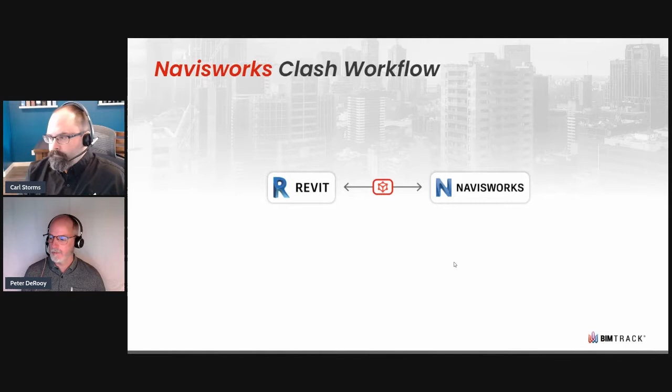So let's talk about the use of Navisworks. The first thing you would do is to set up a 3D view in your model.

Let's say you have a typical team for a project. You might have structural, architectural, and mechanical, electrical engineering firms, and they're working in Revit. And you would have one BIM coordinator that would be responsible for creating

a Navisworks workflow clash report on a weekly basis, typically. So everybody in the team would need to set up in their model a 3D view. In that 3D view, it would just be the model information they were responsible for, their scope of work. They would not have any links, and they would just show in that view what they want to share in Navisworks. So you can create a view template as well in Revit, so you can apply that.

Occasionally you want to make sure that nobody has changed that view. It's quick and easy to make sure that it's going to be set up correctly.

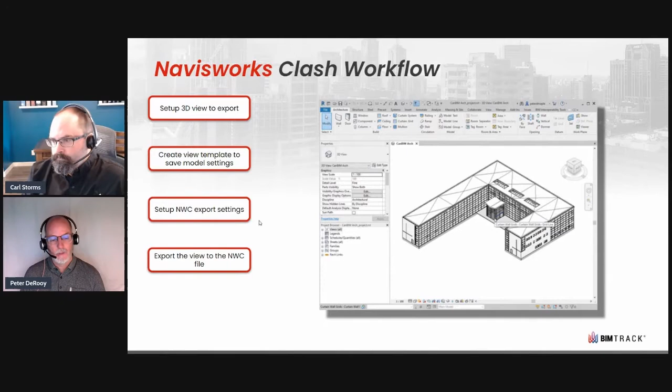Then you would set up your Navisworks export settings, and then you would export out a Navisworks NWC file with the plugin. There are some settings that the team would definitely need to agree on.

The number one important item there is the shared coordinates. There's two different options for exporting out of Navisworks from Revit, and that is project internal or shared.

Typically the architect or the lead BIM consultant would then set up shared coordinates for a project, and then everybody would acquire those coordinates and make sure that when they link in their models and when they're exporting out of Navisworks, that they use shared coordinates.

A couple other items to note here that are important: what you're going to export. The two options there, you definitely want to have current view, the view that you've set up when you're exporting it out, because the other option is the entire model.

There might be other information that you're not quite ready to share, or information that you don't really need. So typically you would turn off all of your annotation graphics and maybe CAD links and other things you might be using for internal coordination or tracing over top of or converting to Revit.

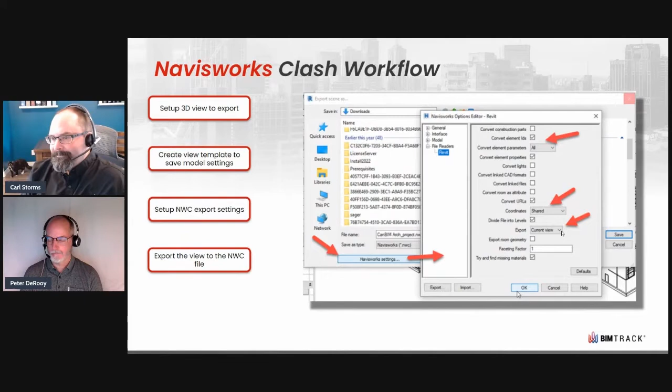The next part would be everybody would need to have some type of file share site where they would upload those NWC files, and then the main BIM coordinator would collect all those NWC files and create a master NWF file. Inside that NWF file from Navisworks, they link it.

It's kind of like AutoCAD where you link in XREFs. That's what an NWC file gets linked into, an NWF file.

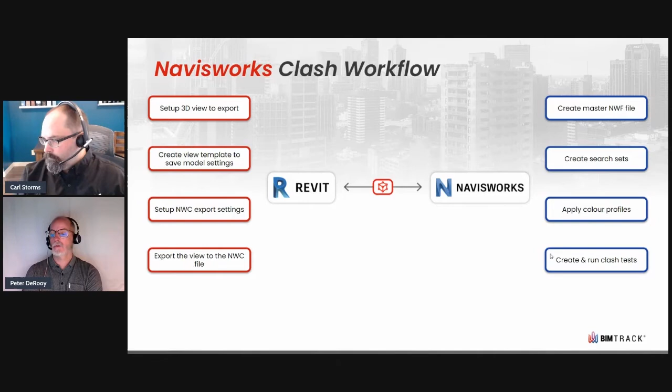In that NWF file, that's the master file where you would create the search sets, apply some color profiles to different things so you can see some different colors for different systems. And then you would create and run your clash tests.

So just a little bit about that. If I switch over to my network directory here, I have a sample data set that's actually a copy of the Autodesk data set, the school that's in every Revit install.

So I've gone through and we've created a bunch of different models for those. These are the RVT files that we're using for this demonstration. Typically then you would open these files up in Revit and export out your views.

So here's the typical Navisworks NWC files. And then they are all linked into the master NWF file that I have here.

So in Navisworks, you'd be setting up some search sets. I can talk a little bit about how to create search sets, but there's lots of YouTube videos and training materials on the web about what a search set is versus a search selection set and how to create them.

I've gone through and created a lot of different search sets to pull different information into those sets, and then we would be using those sets for applying colors in the Navisworks model, so we can have some differentiation in terms of mechanical, electrical, and structural for this demonstration.

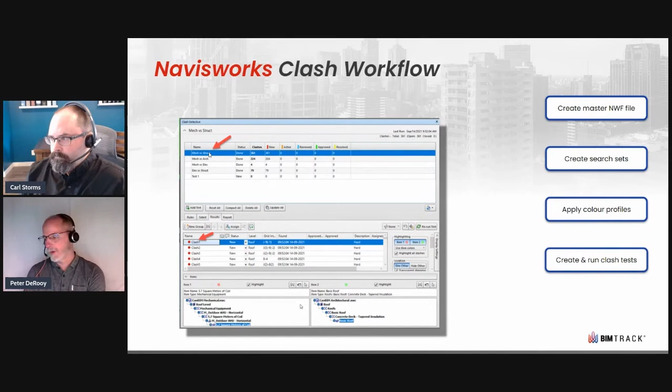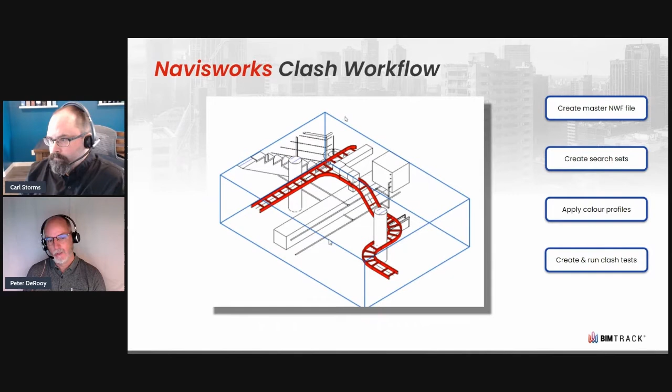So they're going to be involved in the process, but typically their stuff doesn't move. They're approving a sleeve in this location or advising, no, you can't put a sleeve there, you've got to do it in the center of the beam versus where a connection might be. So that's something to think about. So here's an example: in this data set, there's some cable tray that obviously is not quite right.

Now, once you've created all these clash reports, what do you do with them? Well, you have to communicate them to the external parties. And so there's two routes. We're going to talk about the Navisworks traditional approach at this point, and then we will get into how we would use BIM Track to help manage those.

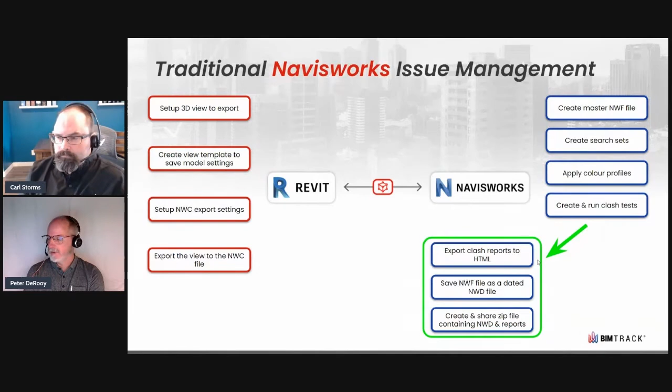So the typical process would be you would export those reports to an HTML page. Then you would save the NWF file as a dated NWD file, so it's sort of a snapshot in time of what the Navisworks model at that moment in time looks like. And then you would zip up that NWD with the reports and upload them to a share site.

So if I go here, there's the NWF file. Once we've got all the updates for the NWCs, we would run the clash reports, and then we would export out the reports. So in this folder here, we have the actual report files in HTML. Now Navisworks can export out different types of files. They can do an XML file, but I find that for most teams, they probably do an HTML report.

And then I've saved the NWD file with a date and time. So that's a timestamp, so that when that gets shared out, everybody knows the date that NWD file was created. And it's a snapshot of time, because let's say a week from now, or 2 weeks from now, depending on how often you want to do a clash detection update, you would then date it at that point. So that way everybody knows, okay, there's a newer version. This is quite old. In the future, this will be like a couple weeks old. So that's something to consider.

Peter, sorry to interrupt, do you ever take advantage of the automatic locking feature of the NWDs? Where, after a week or a month, you can't open them anymore. They self-corrupt as part of this workflow, or do you find that giving them a date is enough? I'm not sure if Navisworks can have an expiry date on an NWD file. I'm not sure.

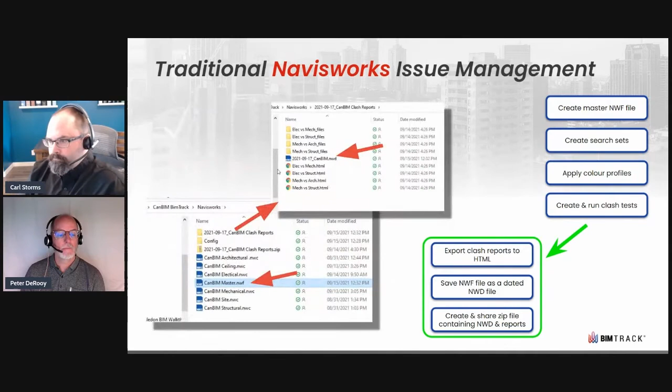So let's go back to the green item actually in the pictures, and you can click on these when you're in the web page, and it'll pop up a little larger image. And you get some information about it, what it is, and most importantly, the element ID.

And also, one thing to note as well is that for every clash test you create, the clash name, clash number 1, is going to be duplicated. In this case, I did 4 clash tests, so there's going to be 4 clash test 1s. So if the team externally goes and downloads them, how do you get that information back? How are you going to send that information? There might be false positives as well that aren't really a clash.

So if we go to the next slide here, how do you get the feedback from all of these clashes and do a full circle of all the design changes? Because typically you're going to go look at the clashes, and you're going to discuss them if they are important, if they're a constructability issue. There might be lots of clashes that are not constructability issues where the sub on site can say, well, if the pipe is just touching a duct, that's okay, we'll take care of that in the field.

Or you might get a false positive for a light hanging from a structural ceiling. And that's supposed to be clashing because that's where it's mounted in the model, and it's not really a clash. So you have to get that information back to the BIM coordinator to mark that clash as resolved or approved.

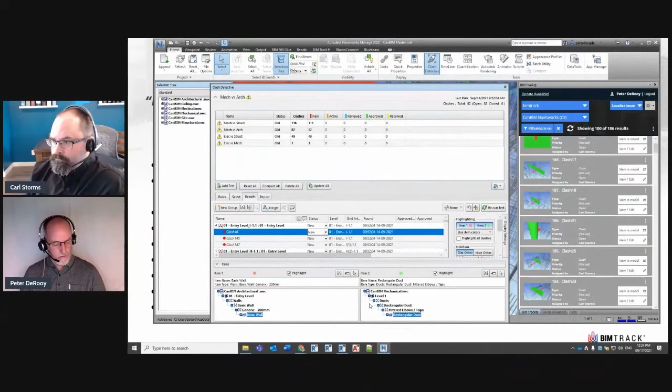And so where do you find the clash test? So the other thing about Revit and using this is when you go back to that HTML page, let's get back to here. If we go back into the view, you'd open the HTML pages, you can copy and paste that element ID into your model, into Revit, and go find it.

And so you have a rough idea where it is, but if you have a very large complex with multiple layouts, because it won't fit on a sheet. So if you're doing a factory or a large project, then you have to cut it up with a key plan. Where is this? So that's where the grid intersection is helpful when you group it. But also the grid intersection might be in here as well, and the level.

And the element ID is one way that you could go to, let's say if it's a light or a cable tray in this case, you could go into the electrical model where the cable tray is, open up whatever level that it's showing on, so in this case level 1, and do a select by element ID. And then you can go find where it is, and do a little 3D view in Revit to find it, so you know how to fix it.

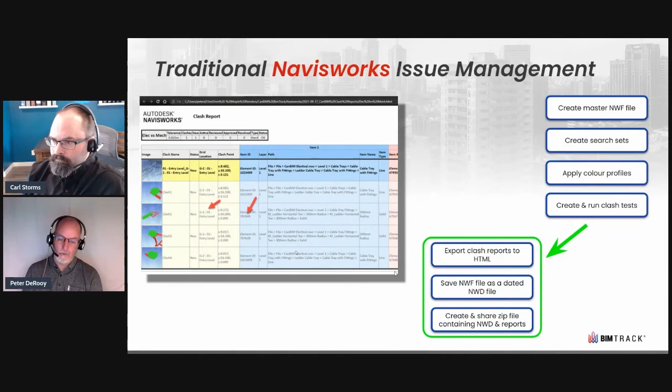So that's after the consultant team has gone through and said, yeah, I'm going to move my cable tray, and decided who's going to move the stuff. Obviously the design managers that are designing the project may not be the BIM modelers. So they have to go through and review these reports, have a discussion, who's going to move what.

And obviously structural is probably not going to move. Architectural is probably not going to move, but mechanical and electrical, and definitely ductwork and piping, have to weave each other in there without clashes. So depending on your project, you would set up those priorities. So yeah, that's basically, you have the level, and it is a bit slow.

Now, BIM Track does have a plugin for Navisworks and for Revit that you can pull the issue up and quickly create a 3D view from that, and we'll show how quick and easy it is to find the information to resolve it. So the team members that are working in Revit, it would be great for them. So let's continue on then.

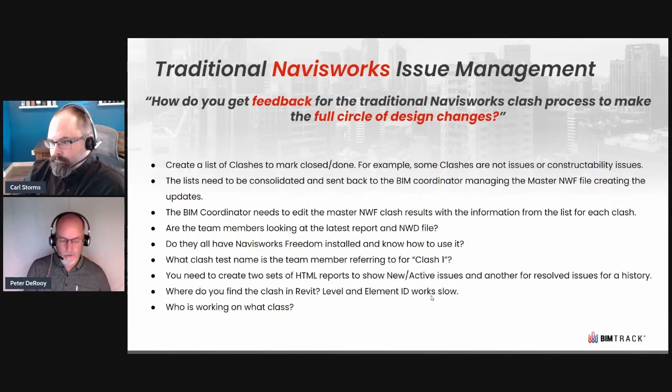So now let's talk about the Navisworks workflow. So in BIM Track, you have a bunch of different features. So Carl, do you want to speak to some of these features? I can speak to some of those, but before we get into that, we did have one comment that came in, which I think is perfectly timed. Victor asks, how about that switchback feature?

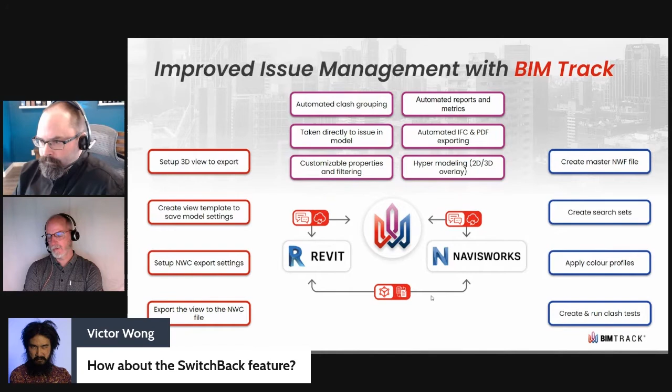Okay. Well, I've been using Navisworks for many, many years, and the switchback feature works sometimes, but it is very slow, and most of the time, most people can't get it to work. It's one of these features where you have to export the model to Navisworks and have the model that you've exported to Navisworks from open in Revit on the one screen and the Navisworks file in the other.

Now, when you're looking at multiple consultants and multiple versions of the files, the Navisworks file you have open might be a consolidation, like an NWD file that has a mix of all of the models in there, and you might see a clash. And you also have to have the full version of Navis, meaning Navisworks Manage or Navisworks Simulate. It doesn't work with Navisworks Freedom, which a lot of people on the review side might be using while deciding and looking at the reports and discussing it on the design side.

So by the time you need to resolve it, it might be a couple of days before you get replies saying, we want you to fix this in the mechanical model or fix that in the electrical model. So yes, Navisworks does have a switchback feature, but I've never been able to get it to work 100% of the time. Probably once or twice I've got it, but most people don't even bother with it because it's faster to select the element ID, copy it to the clipboard from the HTML report, go to that view, paste it in, and select by element ID.

So if I go into Revit here, I have Revit open. And it's funny, as you're saying it, that was Victor's same reply, that he's tried it on his workstation, too slow. And as you're about to show here, this is what you would do. You copy and paste the element ID and you go find it in here. We all know how slow that process is. I believe the saying is, ain't nobody got time for that. So the fact that switchback is even slower than that, I think that's why Victor was a little amused your answer was the same as his. It was a little bit slow, which is why it brings us to BIM Track.

Yeah. So one thing about BIM Track is, at that point when you export the HTML file, you wouldn't actually export an HTML. You would use the BIM Track plugin in Navisworks. So let me jump to Navisworks here. If I go to BIM Track, that's where you would publish the clashes to issues. In BIM Track, a clash like this is called an issue. It has a clash name, but the issue number is going to be unique in BIM Track.

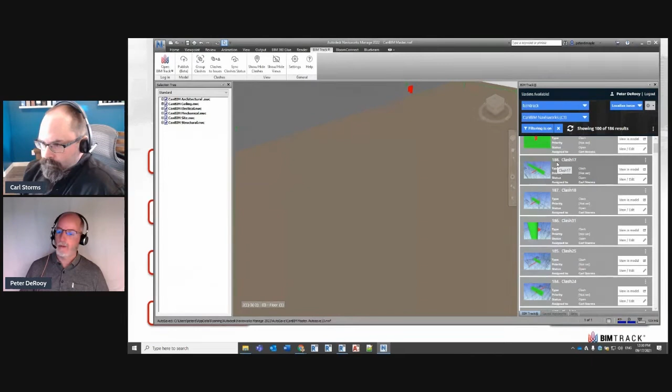So you won't have to worry about talking about clash number 17. You would say issue number 188. That is an issue for that. If I were to do a search for clash 17, I'd probably find a few, probably one in every report except mechanical and electrical, because there were only 4 clashes in there.

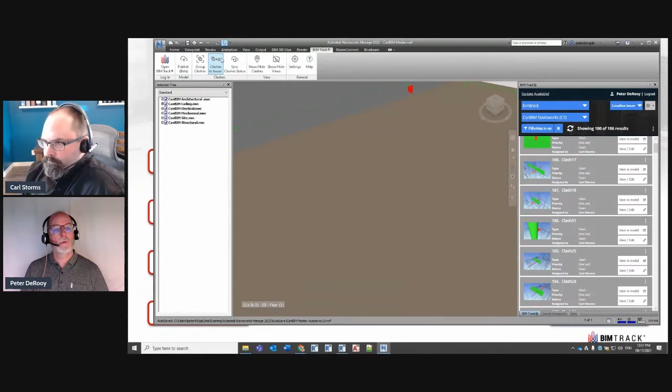So basically you would go through the process and select your clash, and you're connected with the plugin to the project up on the cloud. I would just publish new and active. And you have different information. Mechanical and structural, you would be setting up your disciplines here. So, okay, I want to assign mechanical and structural to this publish. And the type is going to be an issue.

Another thing to note is that you can use BIM Track to post other information besides just a clash issue. You can upload a document as an attachment and call it a document, or you could do a comment, or that kind of thing. Or you could say it's a clash too. I guess that was in the default template that we opened up here.

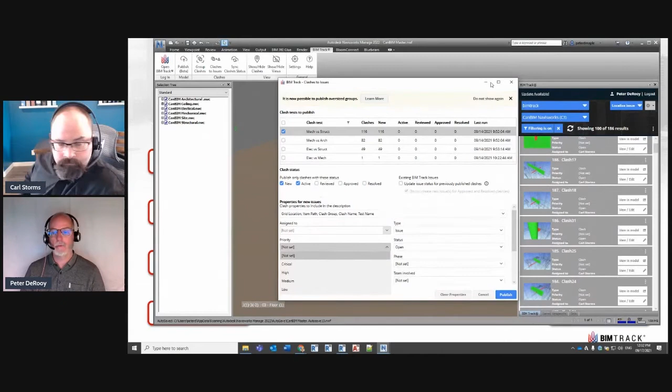And then of course, at this point, we're not going to set a priority because there might be a lot of false positives, so that list of people can review online. If I switch to the actual project, I've already done this. So this is typically what you would do, and then you direct people to the web page.

So the web page is right here. If I go to projects, you would get a login ID. And there's the project for our demo today. It's got a bit of a dashboard talking about how many are due and that kind of thing. And we have the issues right here.

Now, if I was a structural or mechanical guy, I wouldn't really care about electrical. So what I would do is filter the list. For filtering, I could say I really just want to look at electrical versus structural at this point in time. So let's do that. If I say apply, it tells me that there's 49 results. These are 49 clashes, and they've been grouped.

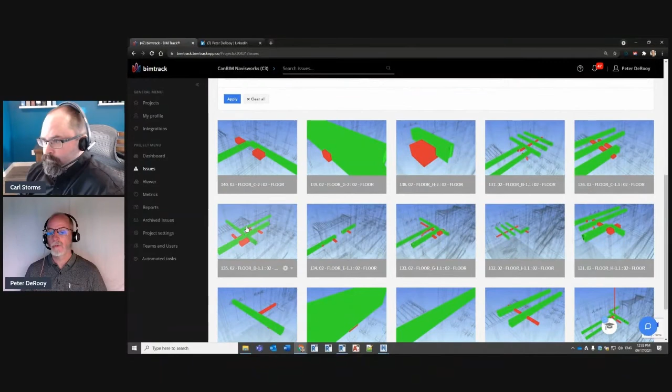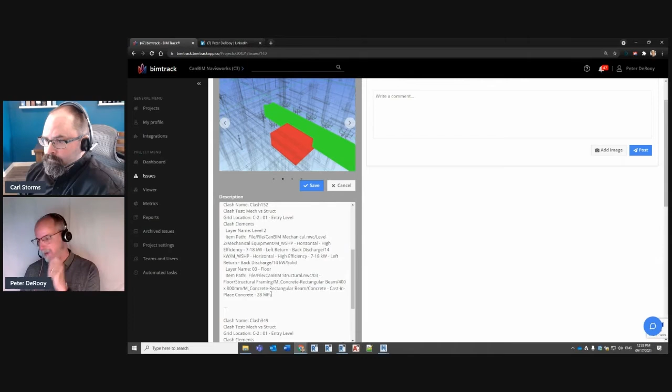If I click on this one, for example, I can go through and see the individual clashes, and it gives me information about it. If you click on here, we can get into the clash and start looking at more information. I can bring this bigger. So all of that report information that was in the HTML, most of that is here. You have information of where it is, so you can annotate, comment on it, do attachments and so forth.

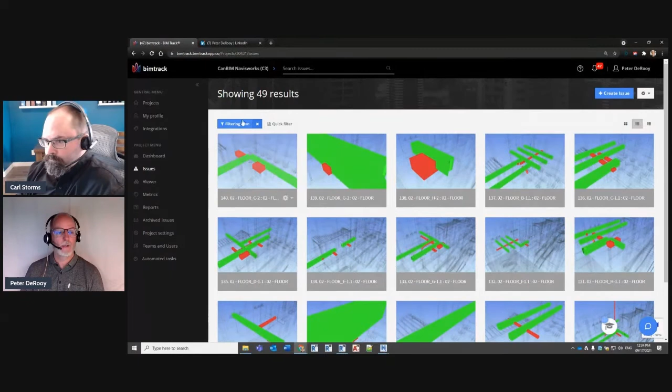So this list would be something that multiple people can log in to, start looking at their issues, and find things that aren't really an issue. So if I search for mechanical versus electrical versus structural, for example, we'll go apply. You can also search for your discipline if you just want to look for electrical. That's another option.

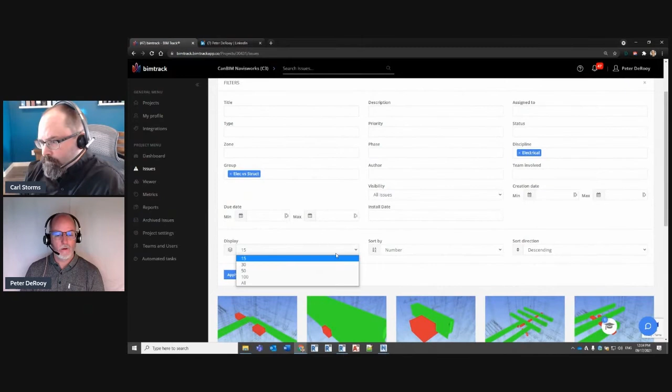And you can do a title. You can search and filter many different ways. So I'm going to display all of them, and I'll do apply. The results were 49. So let's take a look at this one here.

Now, BIM Track also has the ability to view the model online in 3D, because part of the process is that the viewer has IFC files that are exported by the Revit plugin. If I go back to Revit, I have a BIM Track plugin, and there's a publish button. For publishing, if I cancel out of here and scroll back up, I've got 3 different views: the ceilings, the electrical, and the mechanical. I would be publishing these up to the cloud as an IFC file with the publish command.

So right here, I'd select the views that I want to publish. If I wanted to update the mechanical in BIM Track, these would be the same views that I'd be exporting out to Navisworks and also publishing up to BIM Track. So with the publish command, hit publish now.

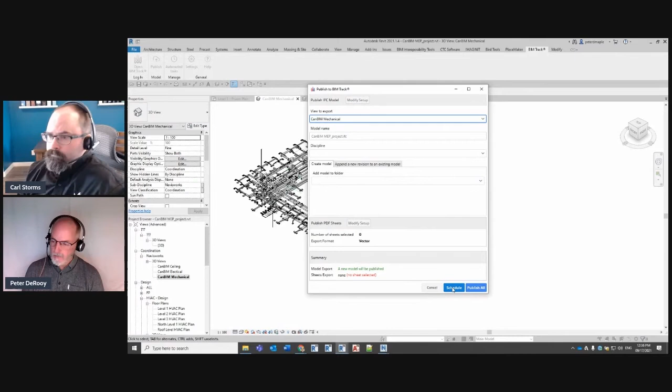The other thing is that BIM Track has a schedule command, so you could schedule BIM Track to open up the model and publish at a certain time, like after hours at night. Your machine would have to be on, but it would fire up Revit, open up the model, and publish it on a schedule, so you don't necessarily have to do it.

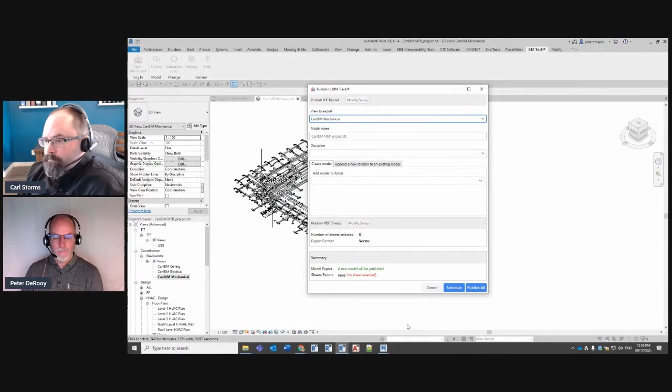You can also publish sheets as well. I don't know if there's any sheets in this model, but we can talk about that a little later. And you can overlay the sheet in the model. So let's cancel this and go back to this issue. If I say open in the viewer, it's going to open up structural and electrical. So let's take a look at that.

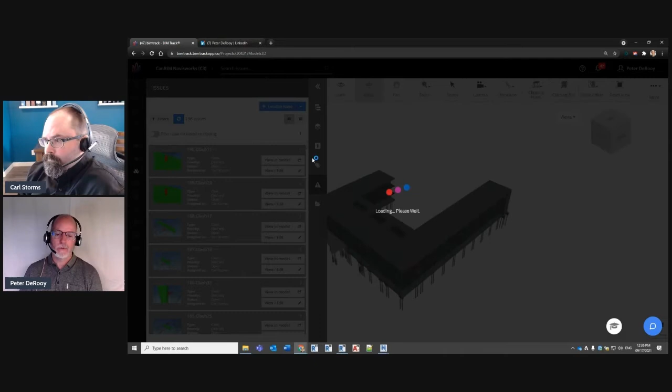So we can see here that it's processing and it's going to be creating a 3D view. And now we can look at this. So it does have a bit of a different interface. I can see that, well, this is a pendant light. This is not an issue. I don't need to worry about this.

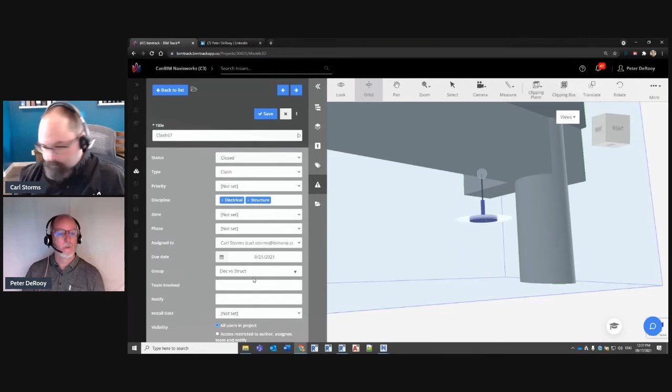So I could go and edit this one now and come down here and say that the status is approved. Or actually, I would say closed, because it's not an issue that we need to worry about. So if I go save now, and I go back to issues, let's go back to issues.

Or 47. Okay, so anyway, at this point, we know that I'm only going to be looking at active issues. So as soon as an issue gets closed by another team member, that whole consolidating a list of non-constructible, non-real issues slowly gets whittled down. Obviously the first time you publish it, a BIM manager can go through each company and start looking at them and closing them to whittle down the important ones.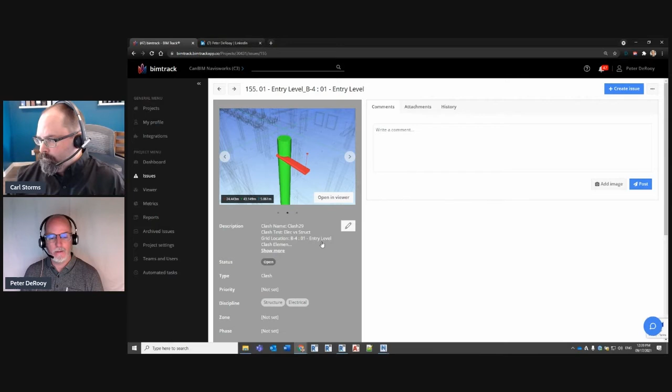Okay, that looks like a column that's not going to move, and it's an electrical light that might not be a constructability issue, because the person installing the light is obviously going to move it. But the question would be asked, well, did the electrical engineer, when he laid out his lights in Revit, have the structural columns linked in? Because obviously you'd know he'd have to adjust his lighting. So depending on whether you want to decide this is an issue or not, you can go ahead and mark it as closed or whatever.

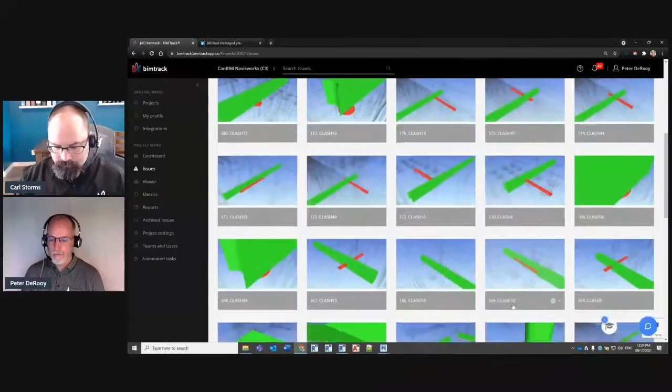So anyway, that's most of the issues. If we get down here, we might have some cable tray in here somewhere. Anyway, so that is the interface.

So the other thing is that in the viewer, you have the ability to set up a view and save it. So this is the cable tray versus mechanical and structural, and this is a view that I saved, and it's got some colors. So right here, that's kind of like that screenshot I showed. So there's some mechanical and electrical, and you can apply colors to this if you want.

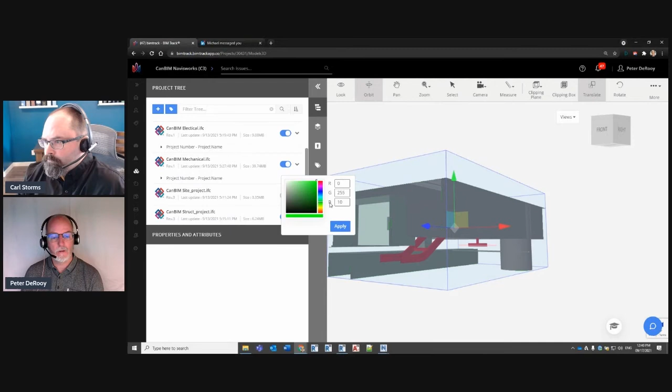So if I went to electrical and changed that, it's already red, but if I went to mechanical, I could change the colors for mechanical to be sort of like a green color. Apply. And then structural, I can see that structural is on.

And we can also see the versions. So as the models progress in the Navisworks file to create the issues, the IFC files would progress as well, and you start seeing versions of when they were last published.

So if I go to structural here, and we'll change the color to a bit of a brownish color, which would be... let's see here, let's find it. Well, I'll just pick a different color. Apply. There's a purple color. So now you can kind of see more information about it.

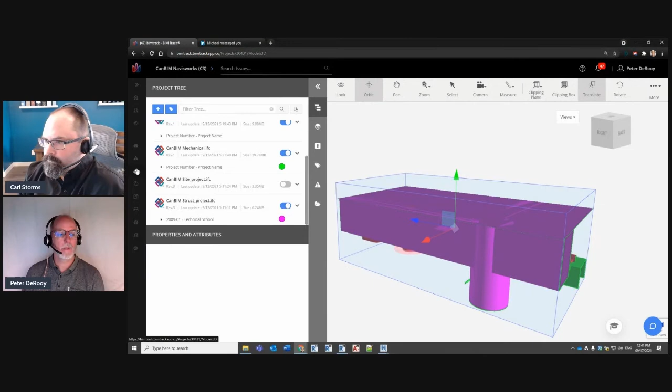And in fact, if I go back to the issue, we can bring that issue into Revit and look at it.

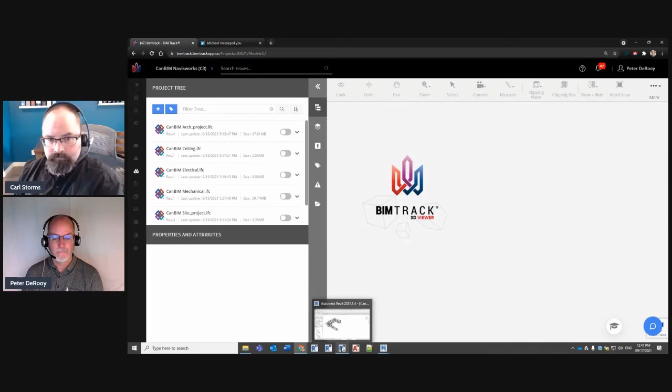So if I go to Revit with the plugin, this whole list of issues now is up in the cloud. So the plugin in Revit and the plugin in Navisworks can reproduce these views. So that was electrical versus mechanical, right?

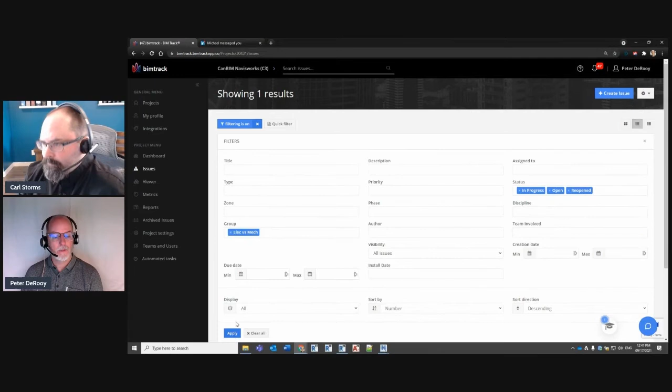I believe that's what that was. So this is the one, inside of Revit. So here it is. So if I open this one, so there's the clash, and then we can see all of the different groups for the cable tray.

So then we added this view from BIM Track, and let's go to Revit. So the number is 141. It's also mechanical versus electrical.

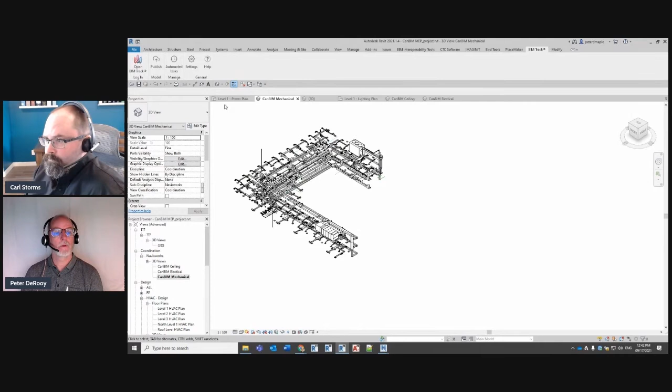So if I go to Revit and I'm in the model, if I go to any view really, so if I go to power and close all these views down, if I go to view, close hidden, I've got no views up. If I pull up BIM Track, so BIM Track has a plugin.

So in this case, I need to filter. So I'm going to go to the grouping, and I'm going to pick mechanical versus electrical. Just go apply. So there's our one issue.

So at this point, I want to find this exact view. If I go to view in model, it's going to create a 3D view and section cut it to that level. It's telling me it'll have multiple instances of the clash sphere in the same place, so just click OK. Now if we look at it, we can see the model.

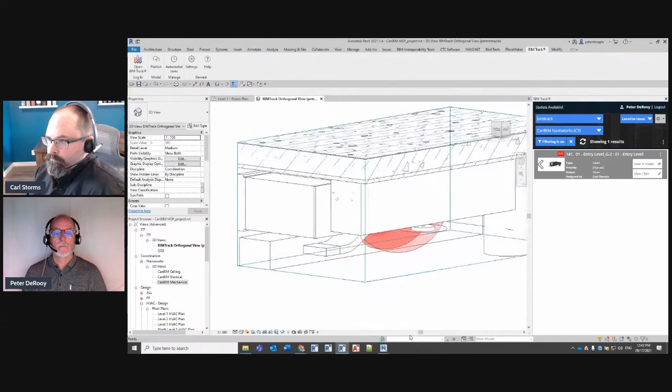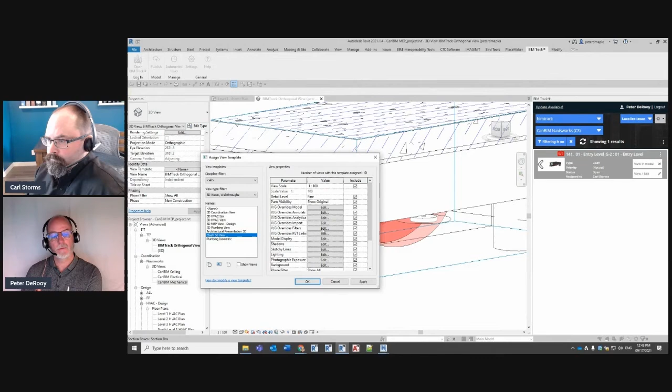I do have a view template to help speed things up. If I go down here to view template, I've already created one called Clash 3D View, and in there I've applied a couple filters. If I look at filters, I've created filters for different items to apply different colors to the view, and that'll be in the handout on how to do that.

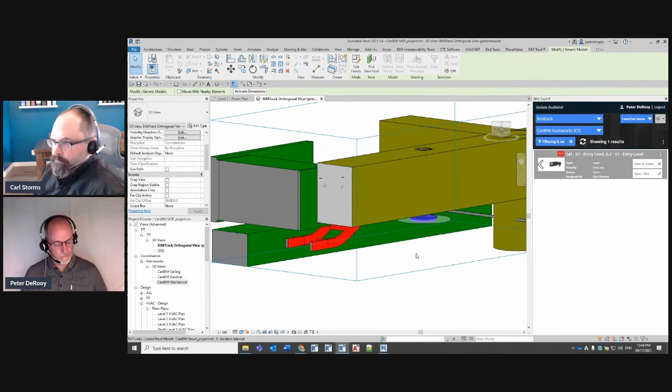So there we have some colors. And we can also turn the clash spheres off, I believe, right here, and hide all spheres. So now, this is actually a section box, so we can grab this and pull it, make it a little bigger for more context.

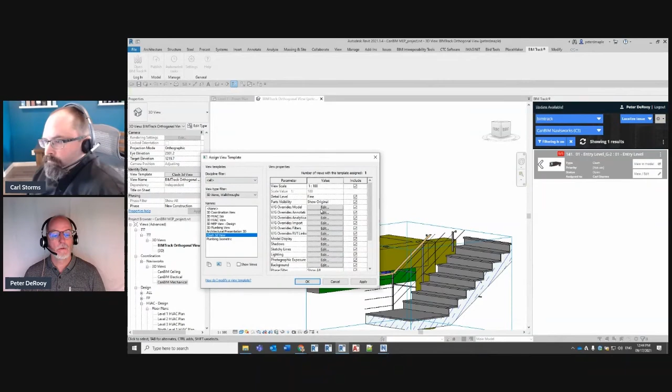So there's close to a staircase. And if you wanted to turn on levels, you could too — you'd go into the view template and apply some levels to it. If I go to annotation, I think levels may be on. Well, it looks like the cut's not there to see the actual levels because it's so small, but levels are on, so if I made this big enough, we'd get to a different area.

So there's the cable tray. It's just below the second floor.

So now, where do you find this cable tray? If I tab select it — so if I went to the power plan, and now if I go to WT, I've got the floor plan here. I'll just shrink up the viewer.

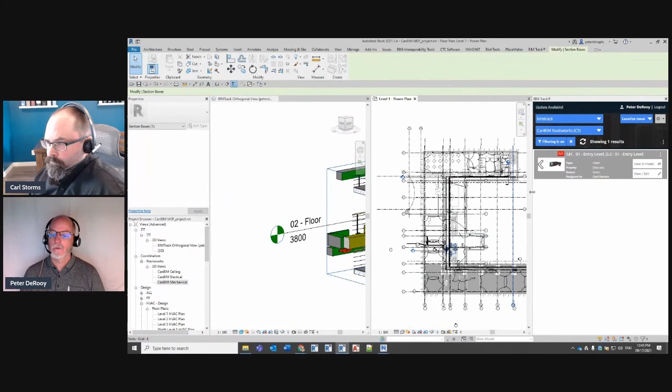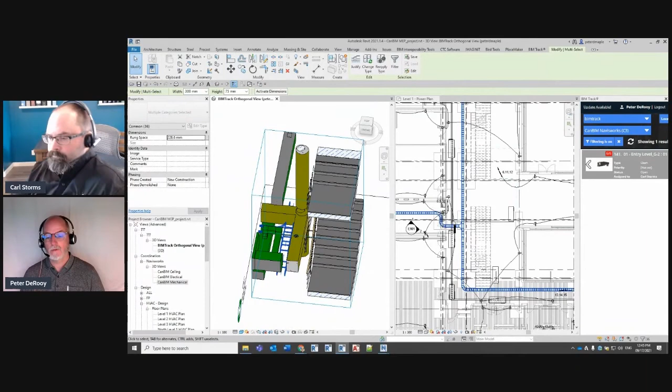Well, maybe we'll turn that off. We want to find that cable tray, so if I tab select it — alright, so I've got it selected over here. I can kind of see that I've got it selected and I've got the entire cable tray. So it looks like the problem is probably right here. So that is the problem.

So now I could go in plan, start modifying this and changing — maybe grab this and slide it up a little bit to avoid a clash. As you can see how Peter's showing this here, this is one of his tips and tricks.

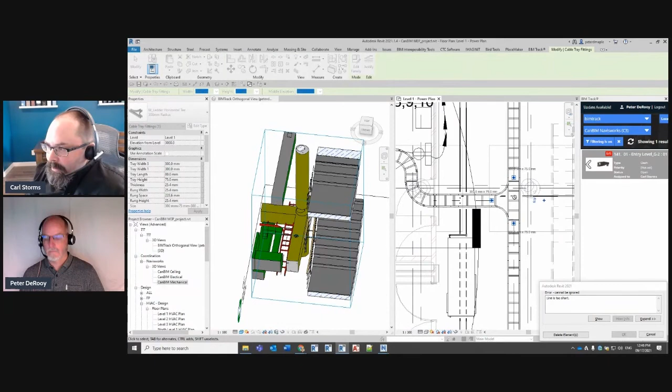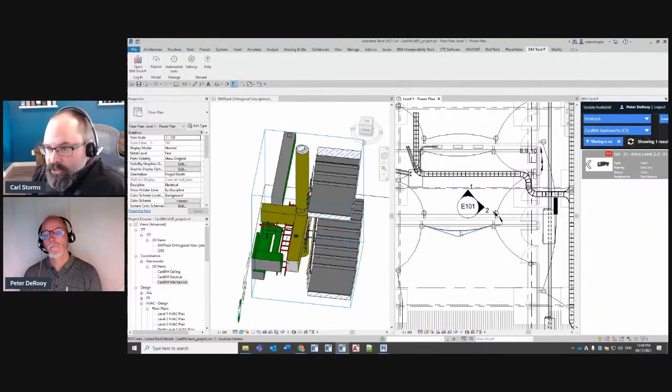But you can certainly see how with the use of the BIM Track add-in and the way the issues are shared in the cloud, anyone can access that and be taken directly to the issue. We can see how quickly we created that 3D view with context, then using Peter's trick of using the plan view and the 3D view, being able to tab through. Imagine how much quicker that is than the switchback discussion earlier, trying to find the issue through spreadsheets or Navisworks — how much this is going to speed up your workflow.

As we're getting near the top of the hour, I think this is a good point — if you want to wrap up the tips and tricks part, Peter, I know that's the part people are looking for before we get into questions. So if we go back to my presentation here.

So there's the clash grouper inside BIM Track. In Navisworks, after you've created clashes, it's just going to say clash 1, 2, 3, 4. So if I switch back to Navisworks really quickly, which is right here.

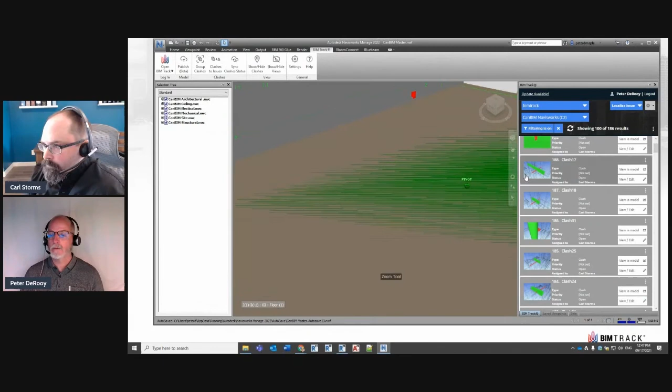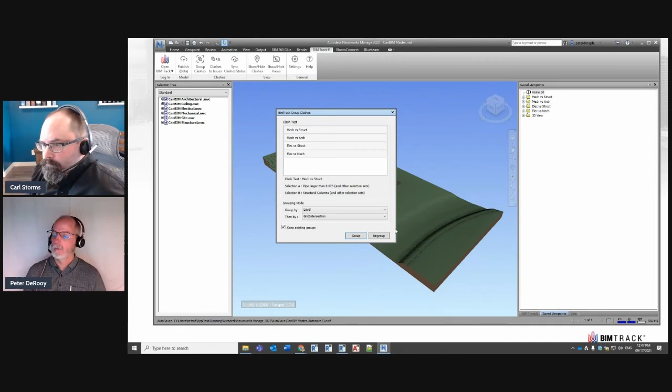Once you create the clashes the first time, if I go back to save viewpoints and go to clash to BIM Track — if I didn't have any groups, I'd go to BIM Track and go to clash group. So you'd be selecting all of your clashes, sort by level and then by grid intersection, remove the groups, and click group, and that way it will create those groups you publish to BIM Track, cutting down duplicates since you may have multiple clashes that are the same thing. That one cable tray item was hitting multiple items, so that's why a clash group is very useful. So the other thing, going back to the presentation.

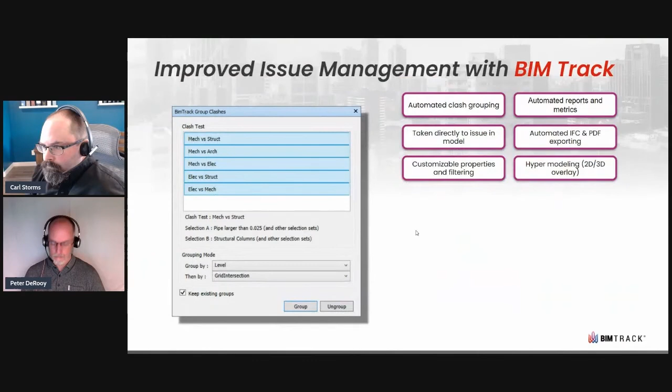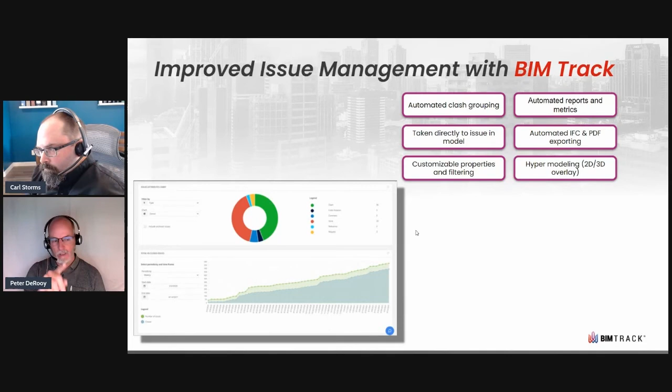So you can get reports, and as you start to see them, you can see the number of clashes that got resolved, and start getting charts from the web page. When it gets into things like reports and metrics, these are the type of things we can cover in the demo after. There's all kinds of reports that you can create and export as well.

It's a great feature because, unlike the HTML report you're working with from pulling from Navisworks, there's all the metadata from the project. Here we're seeing the nice little 3D box we were able to create live, thanks to Peter in the demonstration, and how quick that was bringing it through.

The other ability to see the add-ins. In this example, we saw the add-in inside of Revit and the add-in inside of Navisworks. One nice thing about BIM Track is that the add-ins aren't just Autodesk products. ArchiCAD, Tekla, we have one for BricsCAD, so it's really platform agnostic, and that allows you to keep your workflow the way you want it to be, meaning you don't have to use just an Autodesk product. Whatever your team is working in, you can move in. So that's a nice thing as well.

One other thing everybody should know is this button here, the sync clash status. As people are on the web page, in the portal, on the project in BIM Track, and they're marking them as closed, as soon as you click this, after the week, the BIM manager would open up the Navisworks model, go here, and say synchronize status. It'll actually go and mark that issue in the clash in the actual Navisworks model and change the status to closed.

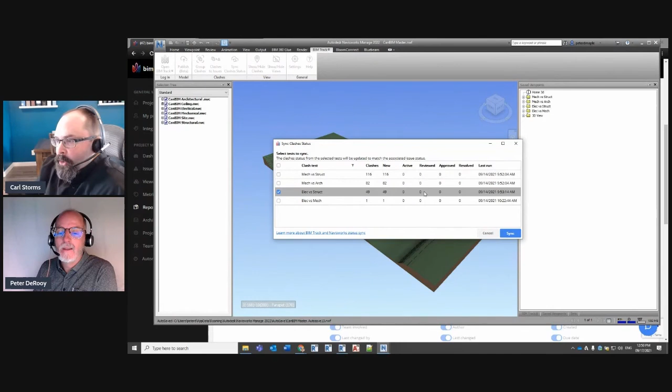The idea and the way it works is when you're working inside of Navisworks, you have the idea - you can either approve or resolve. Everyone has a different workflow for when they're doing that. So when you push the clashes to issues, it takes the status from Navisworks and you can push it into BIM Track. Well, I just did it - it was that fast because this is a small project, so we did it.

And as we see in reverse, it does the opposite. If you close that issue inside of BIM Track, you can see that it will put it through as approved or resolved - you get to choose on the other end. So we have that functionality, but it doesn't happen automatically.

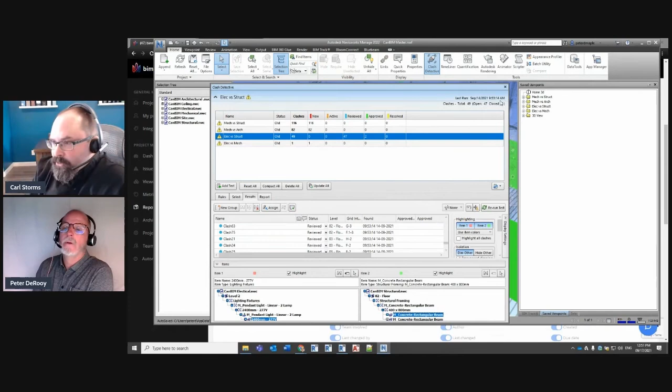The reason it doesn't happen automatically is some people use Navisworks as a vessel - they create the clashes, put the clashes in BIM Track, and do everything inside of BIM Track. With Peter's workflow, where they continue to use the Navisworks model, they want to make sure those issues are closed when they have next week's NWD and the NWD after that. This is a really handy feature because it allows you to push that stuff that's been closed outside of Navisworks back in to get that closed functionality. So I'm glad you brought that up, Peter.

That kind of avoids the whole process of creating a list of non-constructible issues, closing them, not focusing on them, and not having them exported. So no list, and we don't have to check it twice.

The other thing is the automated tasks feature, which will actually go in the background and do your publish of the IFCs, and also the sheets. That's one feature we didn't show, the sheets. Maybe we'll take a moment and show that in the actual application, which would be right here.

So if I go back to the viewer, let's look at architectural. We have sheets here, so we do have an architectural sheet. We'll do first floor plan, we'll turn that on.

And this is part of the publishing process. So this is a 3D view, and I can go to top here, and I can adjust the clipping plane to see that things are lining up, and I can get your grid interface information as well. So that's a handy tool to see.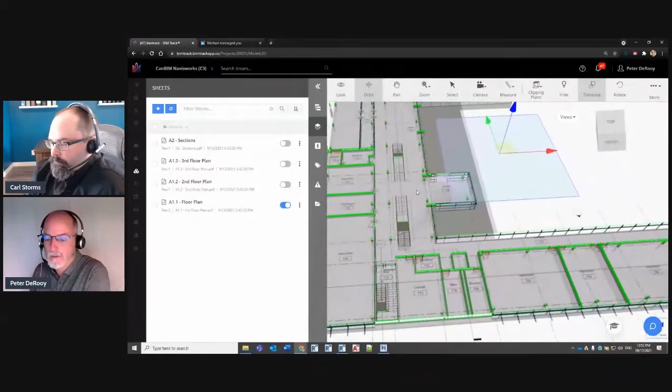These would be sheets that actually have the annotation objects as well. So if you've got notes and dimensions on there, or in this case, room locations, you can kind of see that. So that is a very handy feature as well.

And the nice thing about this, as Peter is showing, is that if you have a sub, an owner, a trade that's not using Navisworks or Revit, they don't need access to those products. They can overlay the two here, what we call hypermodeling, and see all that content in a very helpful way without needing to know how to use Navisworks or Revit.

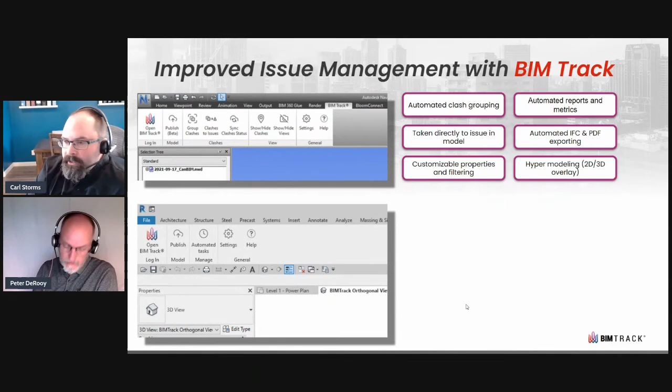And of course, on the BIM Track site, you have the ability to add all kinds of custom fields and modify the templates to suit your workflow, to tweak it for your type of project.

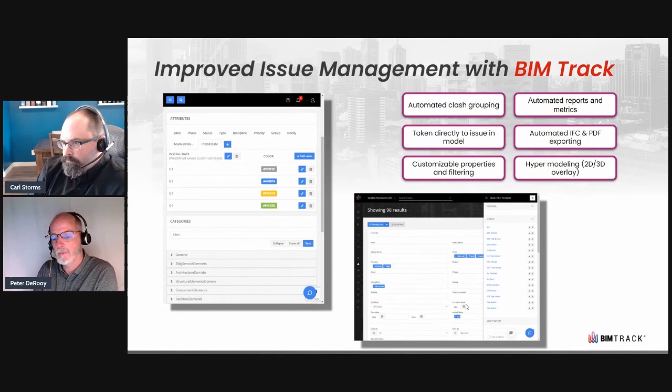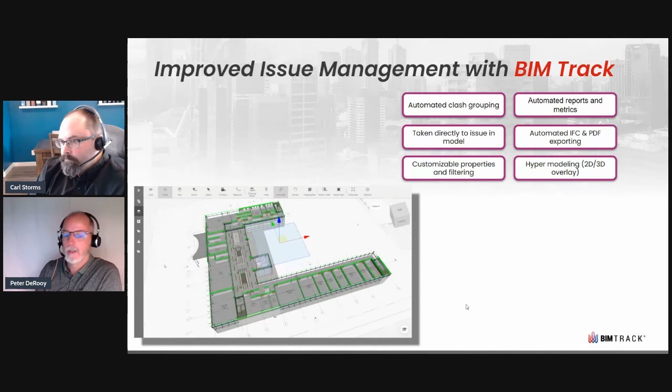I just showed that feature of overlaying a PDF drawing, and BIM Track does come with a PDF driver that you would actually install on your computer. And as you do the publish process, if you pick sheets, it'll do the IFC export, and it'll do the PDF and upload to BIM Track as well.

Essentially, it doesn't replace Navisworks, because BIM Track doesn't actually do the clash detection, but it augments it to facilitate people automatically seeing the clashes. They don't need to open up Navisworks Freedom. They don't need to upload and download reports.

And another issue I've sometimes seen on projects with that traditional workflow is somebody's looking at an older version of the model because they say, well, I don't need to go look at that file, I've got the one from last week. And then they start looking at a clash and pointing it out, and someone says, well, that was fixed this past week. Did you download the latest model?

Oh, no, I haven't. But in the case of BIM Track, the team's going to be uploading those things and resolving them. So if he's just looking at it in BIM Track, he does his particular filter, and he'll see, oh, that's been closed. And he could actually filter the closed ones and find that, oh yeah, this has been marked closed. There's some comments.

And another thing that's very helpful for people when they go on vacation and come back, they don't have to know, well, what is the latest Navisworks model? When was it published? What do I have to download? No, it's already in BIM Track. It's all up to date. It's sort of one source of truth going to the web page.

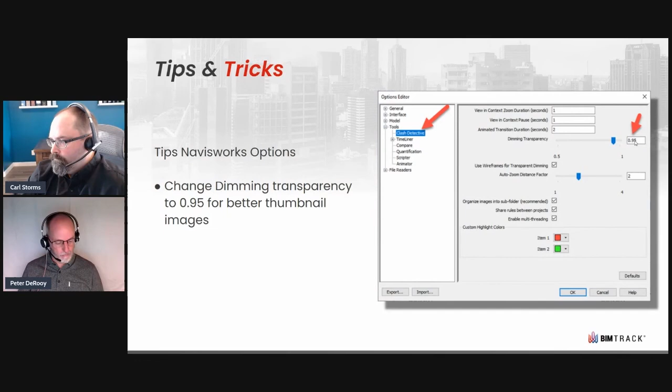Oh, yes, real quick. In Navisworks, when you're creating the images, if you go into the options and turn down your transparency to 0.95, you'll still be able to have dimming on and see the information. So when you're looking at a clash, it grabs the clash detection image. So dimming is in Navisworks.

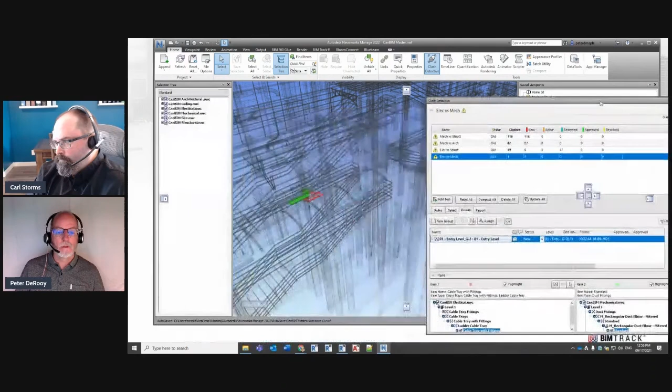When we go into clash detection, if I just slide this over to the side here a little bit, and if I go to mechanical versus electrical, and I click on this clash, so this is the dimming feature. So dimming is this guy here.

You can also set it to hide others, so you only see the clash. But dimming gives you a little bit of context depending on what it is. So that's the dimming feature. So you can crank that grayscale down with this feature here.

The other thing is, if you ever get into Navisworks and you're importing IFC files, when you're looking at a construction workflow like I do, we might get an IFC file from the structural fabricator and from Tekla. They export an IFC file quite often for us, and we bring it into Navisworks, and we can overlay it against mechanical and see the nuts and bolts and what they've actually decided to change in the structural design. So sometimes you have to make sure that your IFC is bringing in everything.

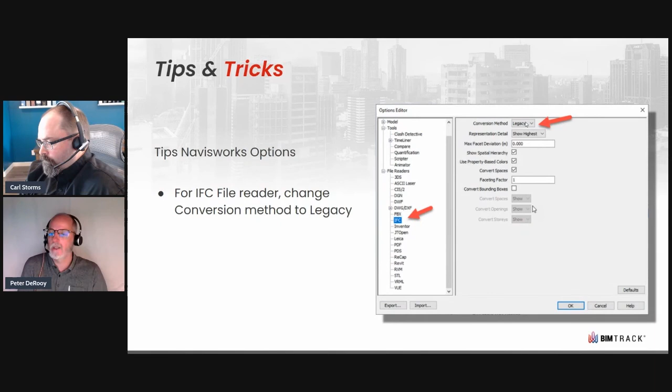I found if you change it from, what was this one, modern to legacy, you need to set it to legacy. Correct. That's right. So, and then for performance,

you could also go into the model performance here, and I usually like to tell people to close NWC and NWD on load. So if you download the files and you stick them on the network, and you want to open it, it will unlock the files after you open it. So if you're in the process of working on an NWF file, and somebody wants to update the NWC file for you, they wouldn't be able to overwrite it unless you close the NWF file. So if you had this on, they would be able to overwrite it.

No, you would still have to close and reopen the file to get the update link to be showing. But anyway, the optimize on load is another way as well to sort of build a bit of a cache on your local drive. So that's another tip.

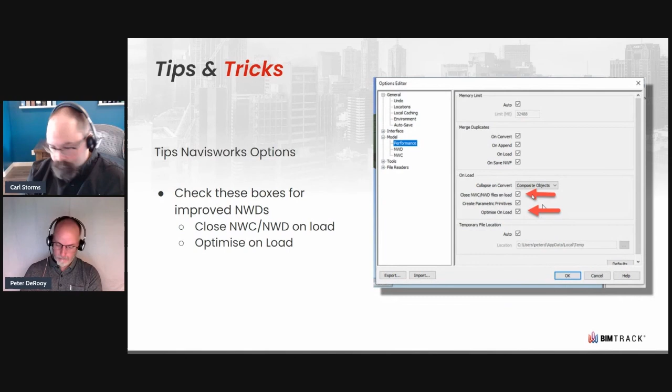Here's the tip that I showed before about creating a view template and showing the visibility graphics filters override. For this, you do need to create a filter for that particular category. So if I show that really quick, go to Revit here. If I go to filters, so it'd be view, and it'd be filters. And if I look at, I think Mech was one of them. So Mech is the one that I used.

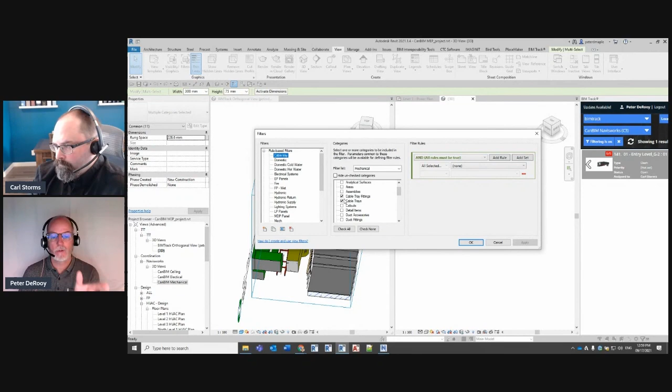The other one was cable tray. So I created cable tray, and all it is looking at is cable tray. There's no options here in terms of filtering rules. So it's just select the two categories and apply that to your view. So if I went to here and I went to the visibility graphics of this one, so that is this filter here. And we look at the filter.

I just applied it to the view. So I just went add, grabbed it, threw it in here, and then you apply your colors here. So in this case, a pattern, I changed it to solid and then red, solid and then red. And then the lines I made black. I just did a solid black so you see a nice outline of the edges. And that's essentially it for that.

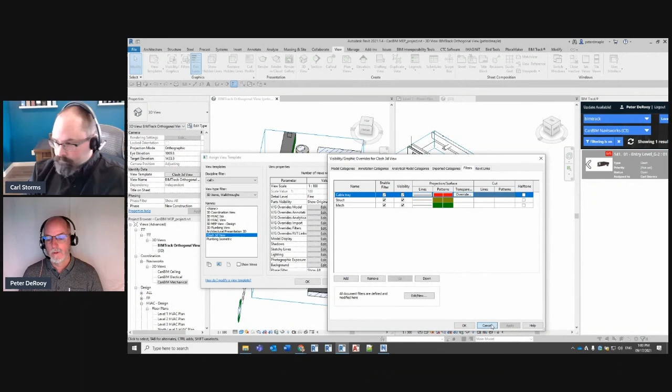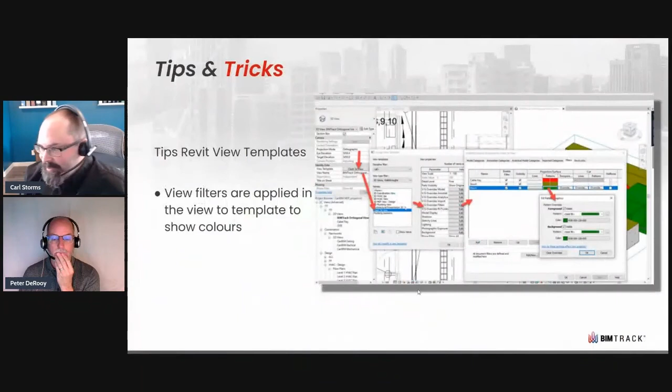So, all right. I think we're just hitting here at the top of the hour. Okay, that's it. And you got to the last. That was the last tip, I believe. We talked about putting the information into the tips and tricks, and I just want to thank everyone for coming here. And I was going to ask if there were any follow-up questions. I know that we've seen a few questions come through in the comments. I've been answering them the best I can as we go through.